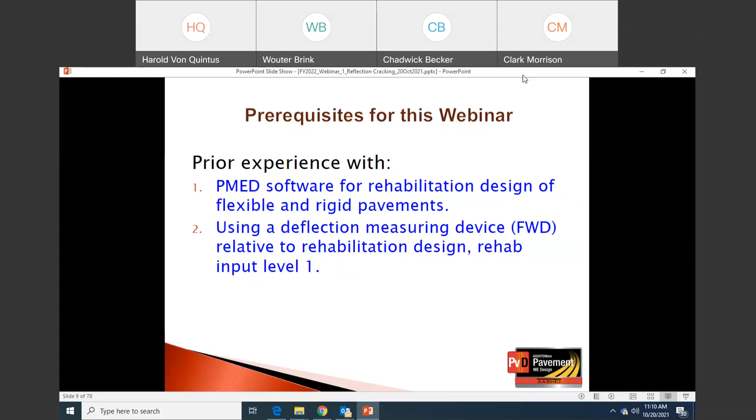Our learning outcomes, there are 4 of them today. The first is to describe the fracture mechanics based model included in the Pavement ME software for predicting reflection cracking in asphalt overlays, of both flexible and rigid pavements. Our second outcome is defining the importance of the load transfer efficiency for cracks in existing pavements and its impact on the prediction of reflection cracks.

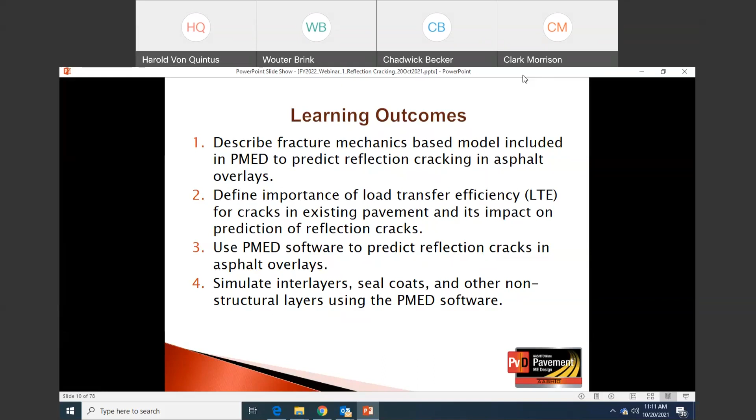Our third learning outcome is using the Pavement ME software for predicting reflection cracks in asphalt overlays. And the final outcome, tied to the third, is simulating different reflection cracking mitigation strategies like interlayers, seal coats, and other non-structural layers in accordance with the Pavement ME software itself.

So with that, this is the outline of the webinar for today. There are really 6 items. 1 through 4 will be a summary, and then topic 5 will be where we spend about half the time on simulation of the mitigation layers for reflection cracking. Then we will have a summary, closing comments, and a question and answer session at the end, like we typically do for each of the webinars.

So we'll start with the history. Very briefly, in version 2.1 and earlier versions, the prediction of reflection cracks was simply based on a pure empirical regression equation, and that regression equation was only applicable to load-related or fatigue cracks.

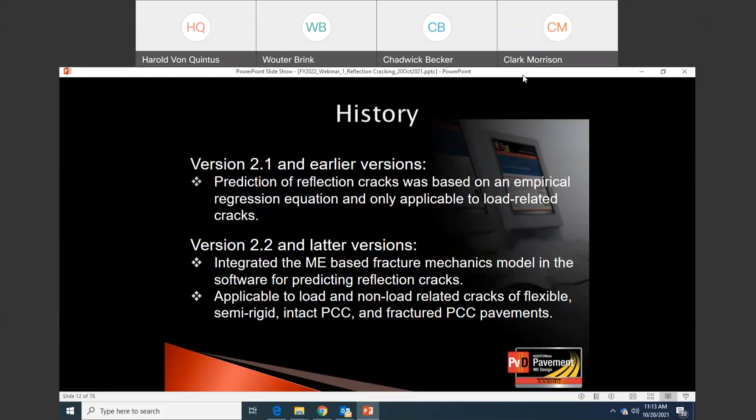The reflection cracking fracture mechanics model was integrated in version 2.2 and is applicable to both load, fatigue, and non-load related cracks, transverse cracks of both flexible, semi-rigid, intact concrete slabs, and fractured concrete slabs and/or pavements.

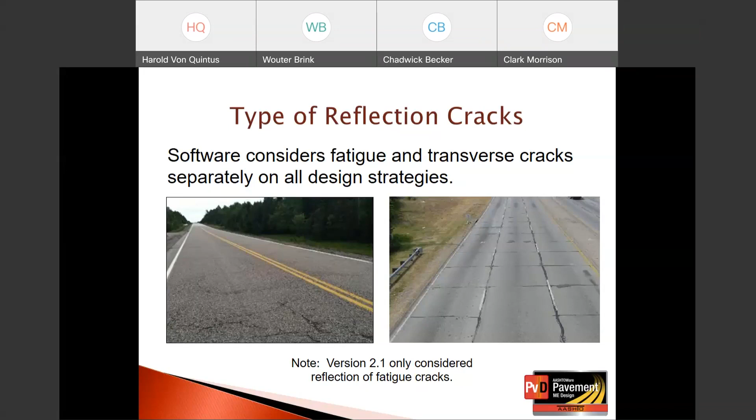That sounds good. So the types of reflection cracks for all types of pavements and rehabilitation design: the Pavement ME software does consider fatigue and transverse cracks separately for all design strategies. As noted previously, version 2.1 was only applicable to reflective fatigue cracks, and the fracture mechanics based version added the non-load thermal or transverse reflection cracks.

As a reminder, the reflection cracking transfer function and models were integrated in Pavement ME from the product of NCHRP 1-41. Dr. Robert Lytton was the principal investigator and guided all of the work in developing this fracture mechanics based reflection cracking procedure. All of the updates on reflection cracking are included in the 3rd edition of the MEPDG Manual of Practice itself.

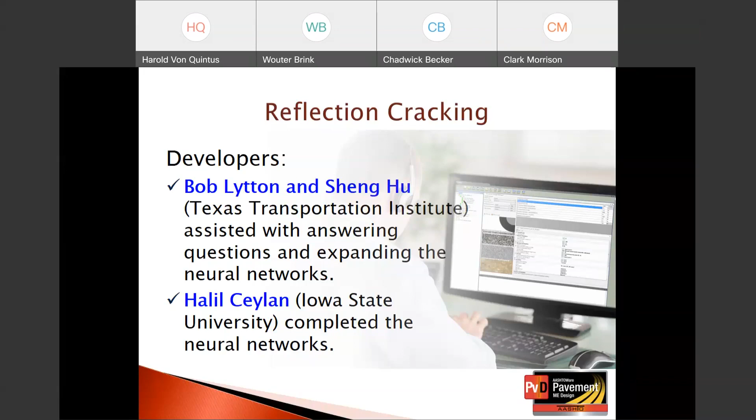In addition to Dr. Lytton, who with the Texas Transportation Institute was involved in the original NCHRP project and also assisted with answering questions and expanding on the neural networks for the reflection cracking models integrated in Pavement ME, Halil Ceylan with Iowa State University completed all of the neural nets, the original ones and the expanded neural nets, included in the Pavement ME software in 2015, version 2.2, as well as later versions.

So now moving on, we want to go through the mechanism and the designs. There are basically 3 types of mechanisms included. The first and more important is the differential vertical deflections across joints and cracks in asphalt and rigid pavements. These are traffic induced and basically shear related, the cracks initiate and propagate in shear itself.

The second mechanism is thermal expansion and contraction of the joints and cracks in the asphalt and/or rigid pavements. That is thermal induced, and the crack initiates in tension but propagates in tension and shear over time. The third mechanism is bending related, where we get higher deflections in the overlay directly above the cracks in the existing pavement. This is traffic induced, and the crack initiates in tension or flexural, then propagates in tension and shear itself.

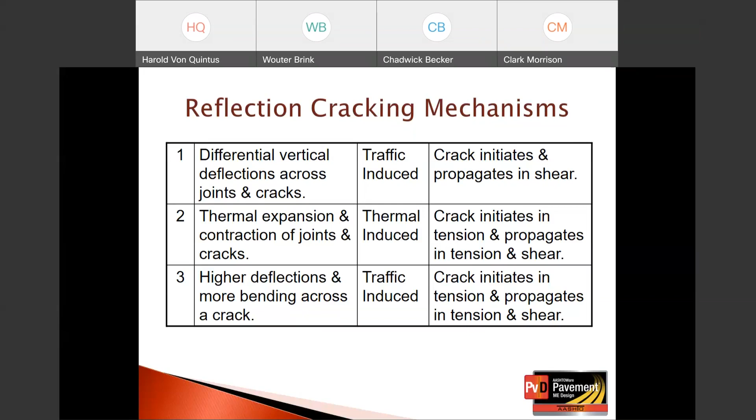Those 3 mechanisms are schematically illustrated in this slide. The 3 we'll refer to are shear, thermal, and bending. When a wheel load goes across the location of a crack in the existing concrete or asphalt layer, there are differential deflections as the load crosses the crack. Those are related to shear in the asphalt overlay.

There's also bending as the load goes across the crack in the existing pavement, where we have increased tensile strains at the bottom of the asphalt overlay. And then the thermal mechanism, which is simply the horizontal movement of the concrete base and/or asphalt layer that causes tensile strains above the crack in the concrete and/or asphalt base in the asphalt overlay itself.

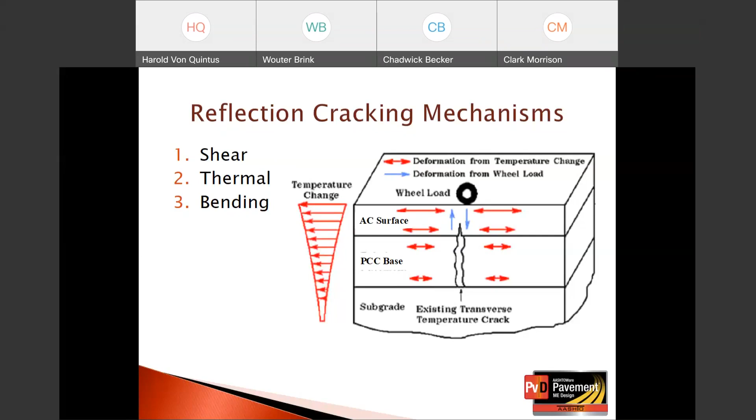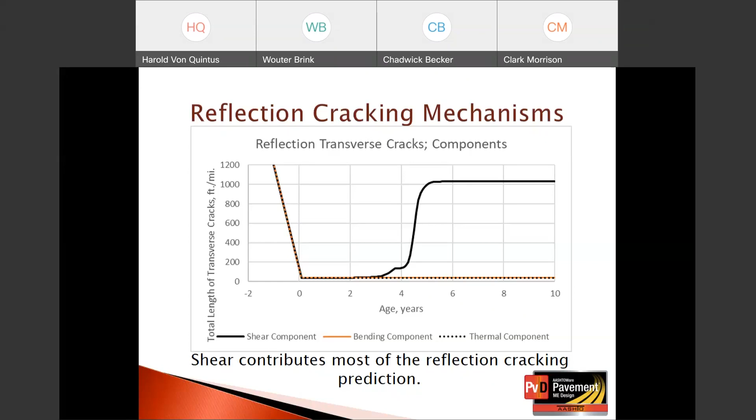The bending in the solid orange and the thermal component in the dashed black lines are minor compared to the contribution of shear as related to reflective transverse cracks. And that's true for most of the situations or the designs, the rehabilitation designs using the Pavement ME software. Now, the different rehabilitation types that can be performed and that are applicable to reflection cracking are listed on this slide.

There are semi-rigid pavements where there's asphalt layers over a cementitious or cement stabilized layer, and reflection cracking does apply, for a new semi-rigid pavement. We have asphalt overlays, flexible pavements, asphalt overlays of semi-rigid, asphalt overlays of intact jointed plain concrete, asphalt overlays of fractured jointed plain concrete pavements, and asphalt overlays of CRCP. All of these reflection cracking scenarios would be applicable to all of these different rehabilitation strategies.

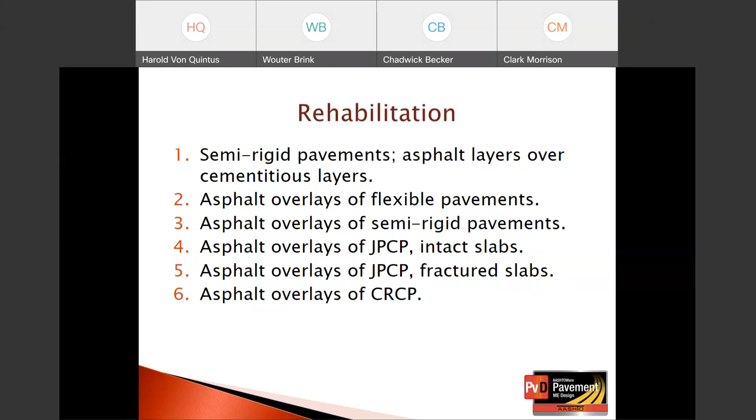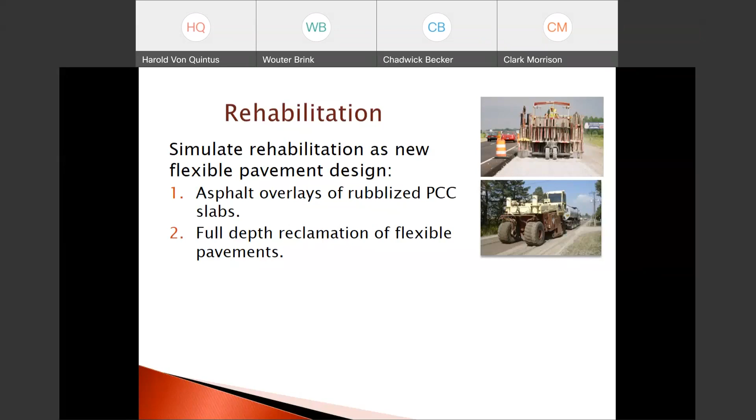ME does have strategies related to rehabilitation, but are considered or assumed to be new flexible pavement designs relative to the MEPDG manual of practice. These two are asphalt overlays over a rubblized PCC slab and full depth reclamation of flexible pavements. Since these two strategies are simulated as new flexible pavement designs, reflection cracks and reflection cracking prediction is basically a non-issue.

The other flexible pavement rehabilitation techniques that do have application for reflection cracking, and that we will cover today, are hot in place recycling and cold in place recycling. Obviously, if the cold in place recycling is consuming the entire asphalt layer that is being recycled in place, then that would be simulated also as a new flexible pavement design. If all or the majority of the existing asphalt layer is mixed in place or recycled in place, then that would be considered a new flexible pavement design, and reflection cracking would not be applicable.

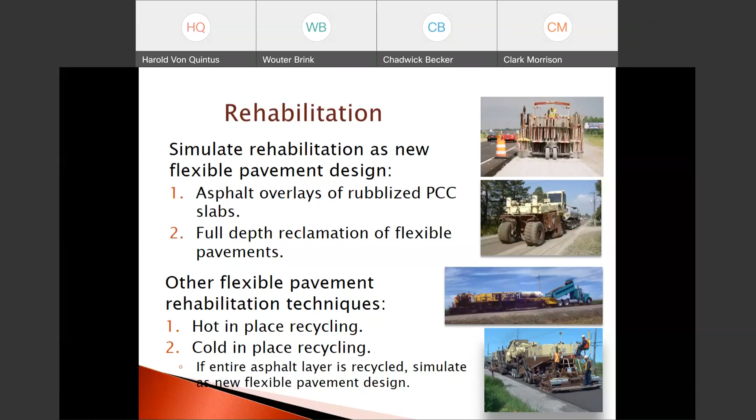The different design strategies that are included in Pavement ME are listed in this slide. The first is simple asphalt overlays on an existing pavement surface. The surface is asphalt that can be milled or not milled. We can also have a simple asphalt overlay over a jointed plain concrete intact, and/or an asphalt overlay over a CRCP. We can also have asphalt overlay design with chip seals or seal coats, as shown in the drop-down box from Pavement ME on the right.

The third we can do is an asphalt overlay with an interlayer. And then two others that are not shown but can be simulated using Pavement ME, which we will cover, are asphalt overlays with a SAMI, a stress or strain absorbing membrane interlayer, and an asphalt overlay with a crack relief layer. We'll cover each of these conditions today in the webinar.

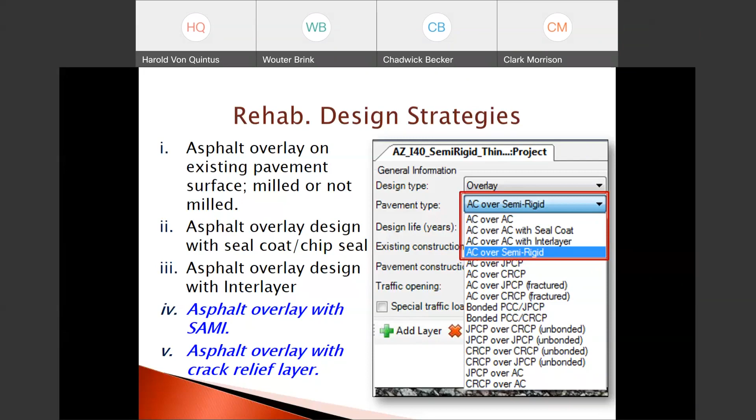So now we want to move to basically the inputs. What are some of the inputs for the different design strategies? I'm going to go through these as you would see them when using Pavement ME. The first are the threshold values, and I just want to make a few statements about the threshold values, specifically related to reflection cracking, as shown at the bottom of this slide in blue: AC total fatigue cracking, bottom up and reflective, and AC total transverse cracking, thermal and reflective cracking in feet per mile.

Some agencies use a different threshold value between total fatigue cracking and reflective, as opposed to new bottom-up fatigue cracking, as shown on the third or fourth line down at 15%. It's generally recommended that the same threshold value be used for new AC bottom-up fatigue cracking and AC total fatigue cracking, that would include new bottom-up cracks in the overlay and reflective fatigue cracks from the existing asphalt pavement itself. Those should have, or it's generally suggested, that the threshold values be the same.

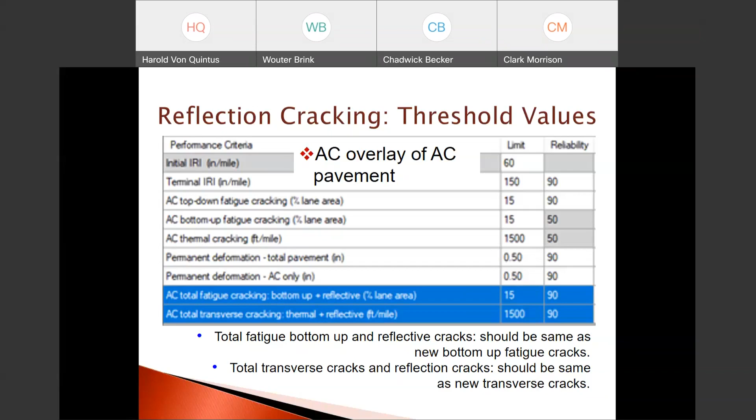For the semi-rigid pavements and/or overlays of semi-rigid pavement, this shows the threshold values. A little different here, where the total fatigue bottom up and reflective cracks should be the same as new fatigue bottom up cracks, should be either equal to or greater. Well, it should be the same for new bottom up fatigue cracks. The chemically stabilized layer, shown by the orange box, where the cement treated base fatigue threshold value is typically equal to or can be greater than the total bottom up fatigue cracking in the asphalt overlay. The transverse cracking would also be the same as new transverse cracks as shown on this slide.

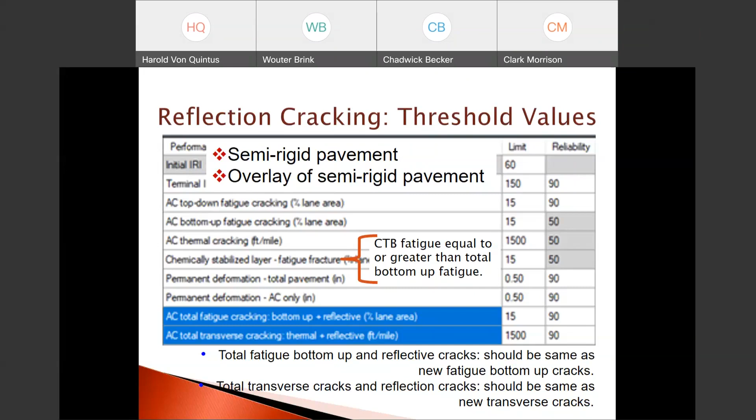In this condition, if we had 15% AC total fatigue cracking, shown in blue as a threshold value, then we could set the chemically stabilized layer to be about 20%, but that's up to the designer and or the agency for providing a suggested threshold value for the chemically stabilized layer relative to AC total fatigue cracking.

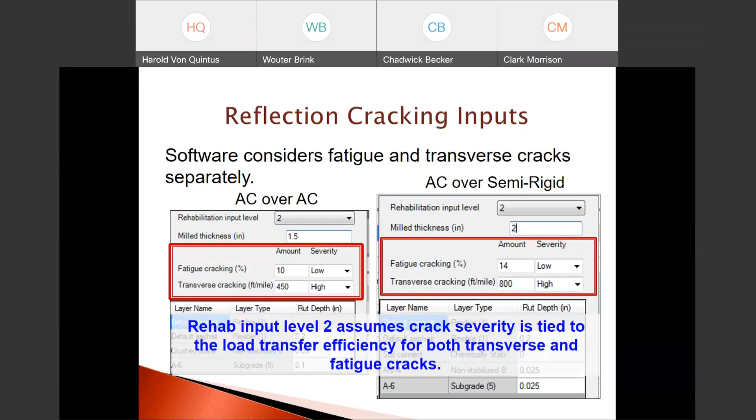The reason the severity level is entered is rehab input level 2 assumes that the crack severity is tied to the load transfer efficiency of both transverse and fatigue cracks. In other words, we wouldn't have any FWD deflection data to measure the load transfer efficiency. So in this case, the crack severity in terms of the pavement ME global values are tied directly to crack severity.

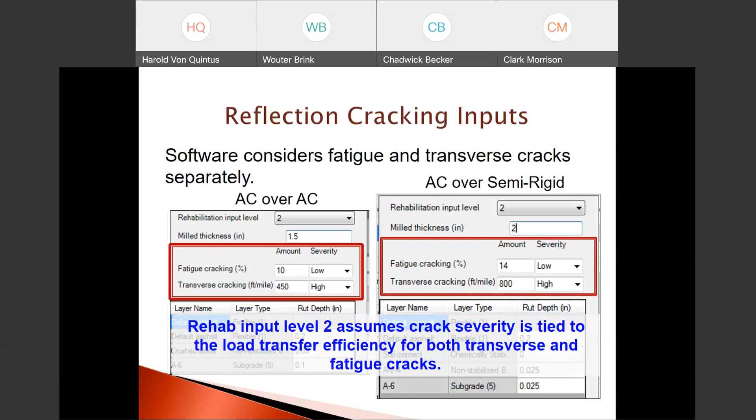This next shows semi-rigid, where we have an asphalt layer over a CTB or cementitious stabilized base layer. Our three inputs for semi-rigid pavements, shown in the red box from the pavement ME drop-down screen, are the crack spacing, the transverse crack spacing, or the shrinkage crack spacing of the base layer, the CTB, which in this example is 25 feet.

The load transfer efficiency of the transverse shrinkage cracks, shown in this example, is 50%. Then also there's the load transfer efficiency of the fatigue cracks that develop in the CTB or chemically stabilized base from a load standpoint over time, also shown here as 50%. The 50% for transverse and 50% for fatigue are the global default values.

As I said previously, the load transfer efficiency of the chemically stabilized base can be measured with the FWD. The load transfer efficiency of the fatigue cracks, since they occur later, is typically considered or included as a calibration parameter.

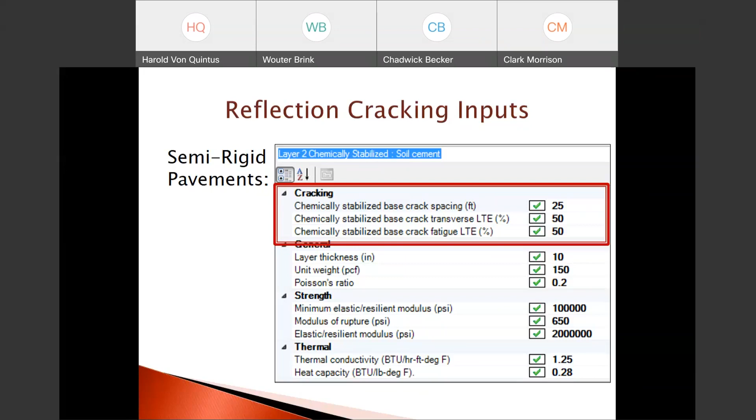This next is the inputs or threshold values for AC overlay of an intact PCC. It's basically similar to semi-rigid. The important point here is that, as shown in blue in the drop-down screen, AC total transverse cracking, thermal and reflective, should basically be the same as AC thermal cracking new, shown in the row above in this drop-down screen. Those should be similar. The threshold for the JPCP transverse cracking would also apply, shown as 20% in this screenshot.

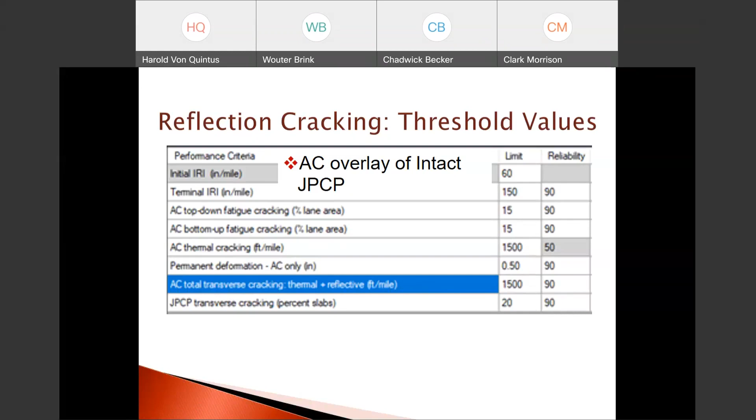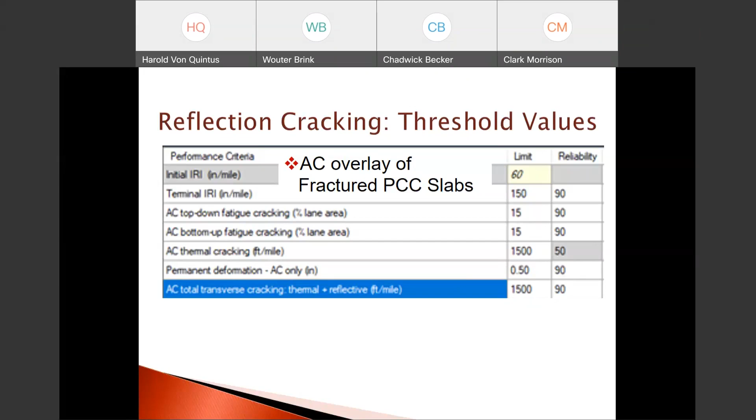This next is AC overlay of fractured Portland cement concrete slabs. Our value here, shown in blue, is AC total transverse cracking, which is thermal plus reflective. It is suggested to be the same as AC thermal cracking new, shown in one of the above rows in this slide. Basically, they should be the same, or it's generally suggested that the threshold values be the same.

The next is the inputs for AC over fractured jointed plain concrete pavement. There are basically two for characterizing that PCC fractured slab: the crack spacing, which is normally 3 feet as the default, though that value can vary from about 2 to 5, and the load transfer efficiency of those fractures itself, shown in the screen as 50%, which is the global default value.

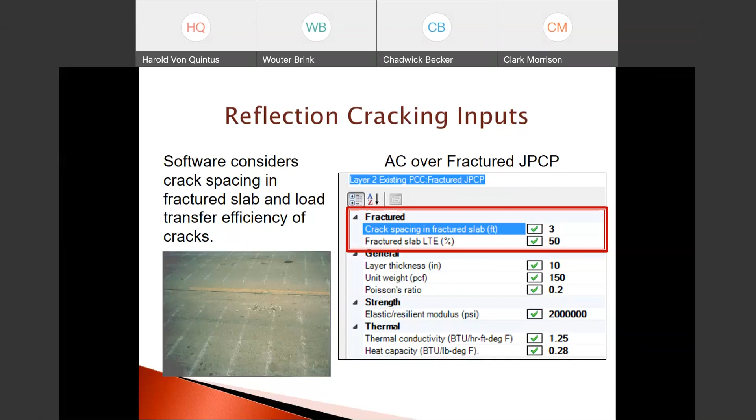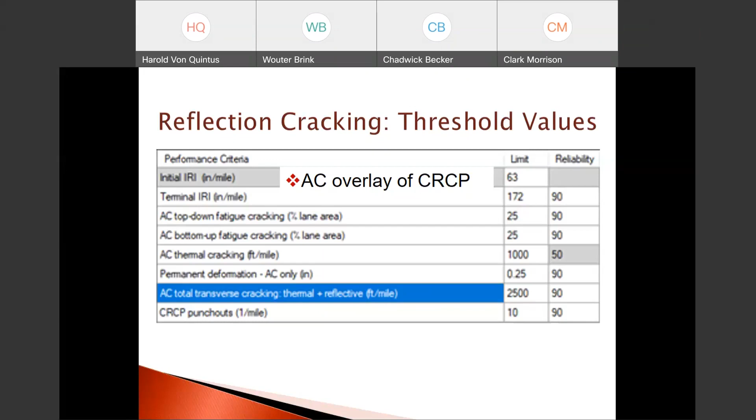Next is the AC overlay of the CRCP pavement. Again, it's recommended that the AC shown in blue, AC total transverse cracking, thermal and reflective, should be the same as AC thermal cracking shown in the above line item. It's not shown to be the same here - that just forgot to change it. Generally they should be the same threshold values. And then also the CRCP punch out shown in the lower row of the drop-down screen.

Now, moving on from the inputs, we want to briefly note the calibration coefficients and provide a couple of comments about the calibration coefficients themselves.

The calibration coefficients were derived using the LTPP sites and a few other non-LTPP sites where data existed, and it was recommended for use within the NCHRP study 1-41, but the majority came from LTPP. The majority of those sites were basically overlays with and without milling. A large majority of the LTPP sites for the rehabilitation calibration of reflection cracking came from LTPP SPS 5 and SPS 6, having to do with asphalt overlays of flexible pavements (SPS 5), and asphalt overlays of concrete pavements, both intact and fractured slabs, as part of the SPS 6 LTPP program.

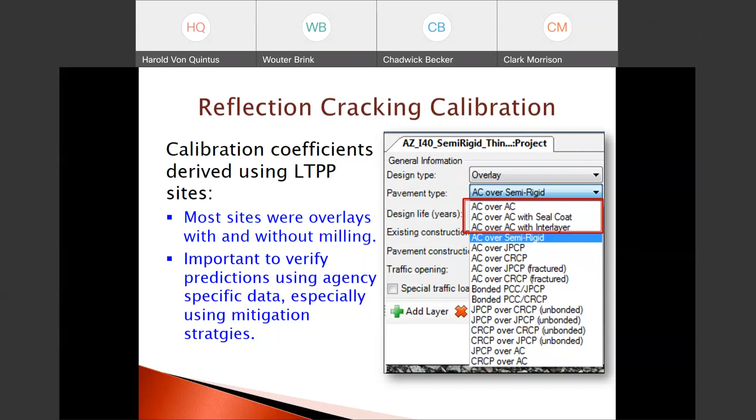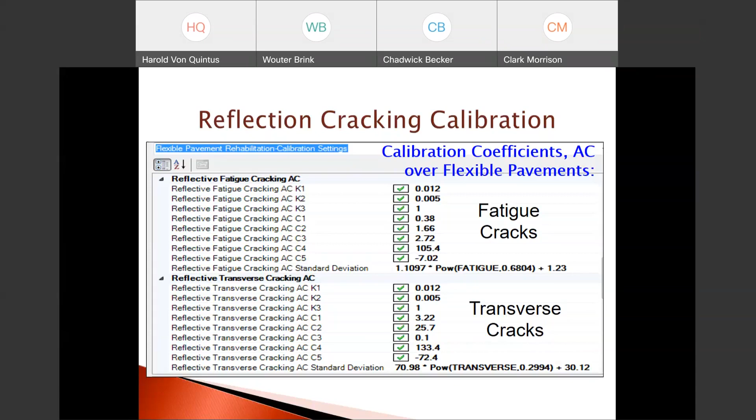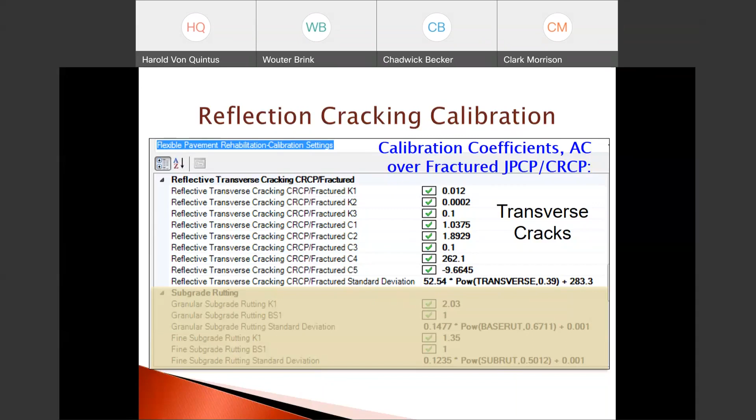Given that, I have one observation we wanted to make, because a lot of these calibration sites were from the long-term pavement performance program: in terms of the seal coats, and to some degree the interlayers, they do not result in a significant difference in predicting reflection cracking for asphalt overlays over flexible pavements.

The reason for that we'll get into a little later, but for the majority of the sites, on average, the seal coats and the interlayers made little impact on the predicted fatigue as well as transverse cracks on these sections that were used for calibration.

Thus, it is important to verify this, because that is not the case with some agencies, where they have found and verified that there is a contribution, especially for interlayers, as well as seal coats, in delaying, not preventing, but delaying reflection cracks. It's important to verify the predictions using agency-specific data.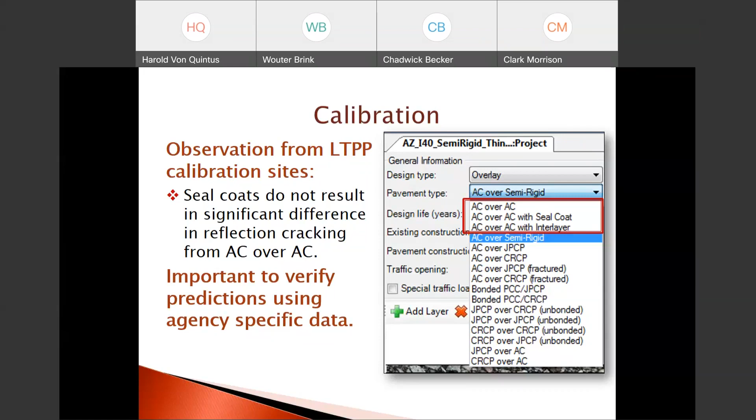So now let's move to the simulation of reflection cracking mitigation strategies. This is where we'll spend probably most of our time, an additional 30 minutes or so. We want to go over the simulation of the reflection cracking mitigation strategies, and also look at some of the high impact input variables.

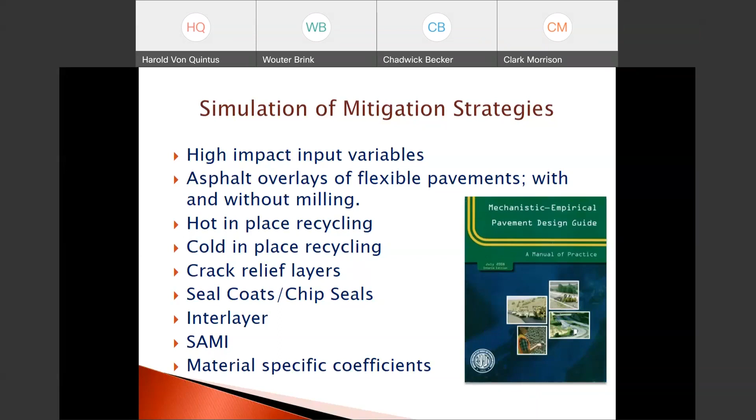This is for whether we have an asphalt overlay of a flexible or rigid pavement. We want to go over how we simulate not only the strategies directly included in the Pavement ME software, but others that can be simulated, like hot in place recycling, cold in place recycling, thicker crack relief layers, chip seals, seal coats, non-structural interlayers, stress absorbing membranes. Then we want to spend a little time on material specific coefficients.

So first, what are some of the high impact factors that have a large impact on the prediction of reflection cracking through the Pavement ME software? Obviously, one of the very important factors is the asphalt overlay thickness. It has a huge impact.

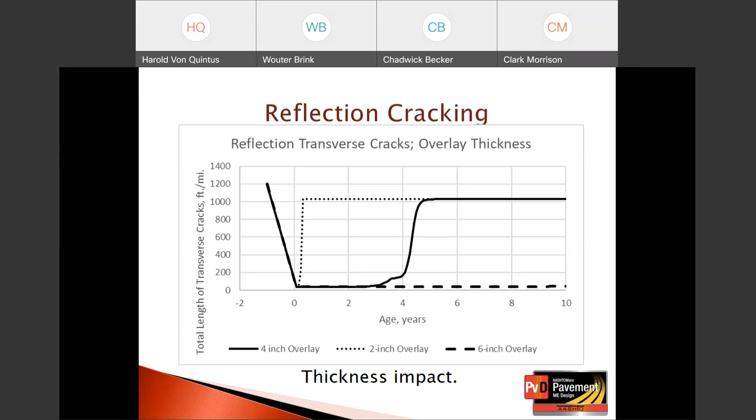They don't start to occur, or we don't start to see them at the surface, until a longer period of time. The 6-inch asphalt overlay, the longer dashed line, shows that it basically prevents, within a period of 10 years, any significant reflection of the existing transverse cracks from the existing flexible pavement through a 6-inch asphalt overlay. Overlay thickness is very important for fatigue and transverse reflective cracks.

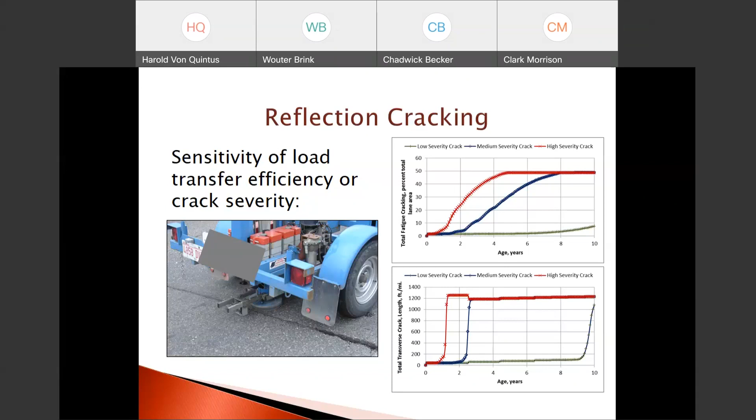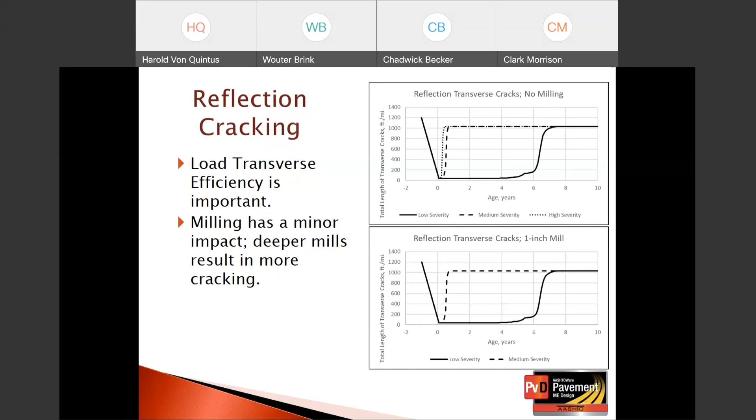Okay, this now shows the reflection cracking for transverse cracking. Again, load transfer efficiency is important. The solid black line on top is for low crack severity transverse. The longer dashed line is for medium severity crack transverse. The short dashed line is for high severity. The graph on the bottom is the same thing, but for only low and medium crack severity with a 1-inch mill. The milling depth basically has a minor impact on the predicted transverse cracks.

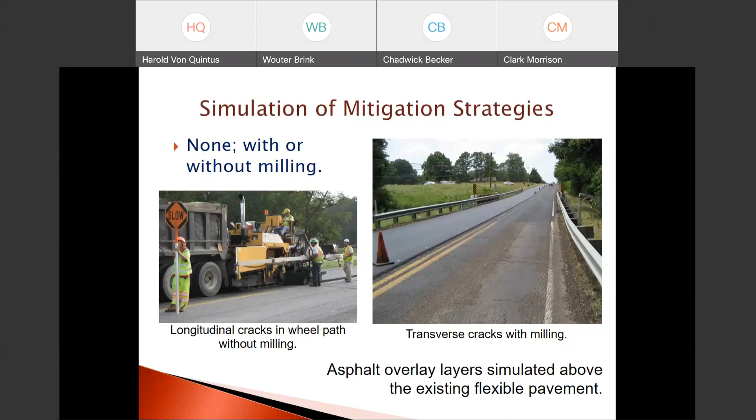Now, moving into the simulation of different mitigation strategies, we'll first do some examples on no milling versus with milling. Without milling, we can have longitudinal cracks in the wheel path. The photo on the right shows an existing flexible pavement with transverse cracks, with milling and then an overlay. Asphalt overlay layers for both existing pavements that are not milled versus those where milling is included are basically the same as for a new asphalt layer. The only difference is simulating or characterizing the existing pavement.

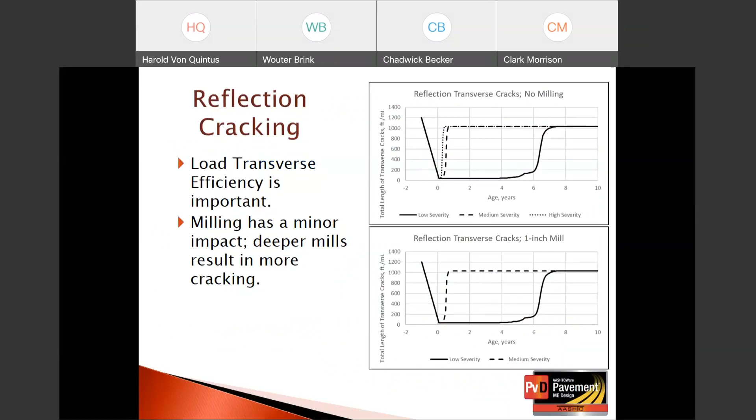So this now shows the milling depth simulation. And we want to make this statement again, we've noted it in memos, it's noted in the MEPDG Manual of Practice, but we want to make sure there's a clear understanding of what thicknesses are entered in the Pavement ME software for a rehabilitation overlay design strategy of an existing flexible pavement. So we have an average thickness of cores of 5.5 inches for a design segment.

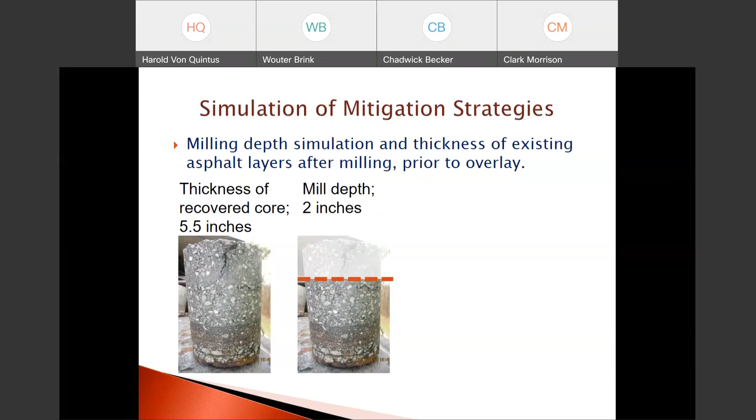We're then going to decide to mill the upper 2 inches, so we're removing the top 2 inches due to milling. So what gets entered into Pavement ME for rehabilitation level 1 or 2: as shown in the middle box, we have a mill thickness of 2 inches, and shown in the bottom box, we have the thickness of the existing layer of 3.5 inches. So the thickness of the existing asphalt layers is the average thickness recovered from cores minus the mill depth: 5.5 minus 2 equals 3.5 inches, and that's what gets entered into Pavement ME for the existing asphalt layers.

Focusing on the middle block, you can see we have our fatigue cracking of low severity, but the amount of cracking is not entered because this is rehabilitation input level 1, and we're having the program estimate the amount of fatigue cracking. Transverse cracking is from the distress surveys, 400 feet per mile, rated as low severity, and both of those get entered into Pavement ME.

Okay, so let me go back. If we're doing a mill and overlay, how do we determine, for rehab input level 2, the amount of fatigue cracks remaining in the existing pavement? Damage is typically defined by the amount of cracking on the surface, or back-calculated using elastic layer theory for rehab input level 1. Those cracks are assumed to be at the surface, or bottom-up fatigue cracks, if we do not have cores or FWD testing. Since they're assumed to be bottom-up cracks, any cracks we see at the surface, even though we're milling 1, 2, or 3 inches, that same amount of cracks will exist regardless of the milling depth for a specific design strategy.

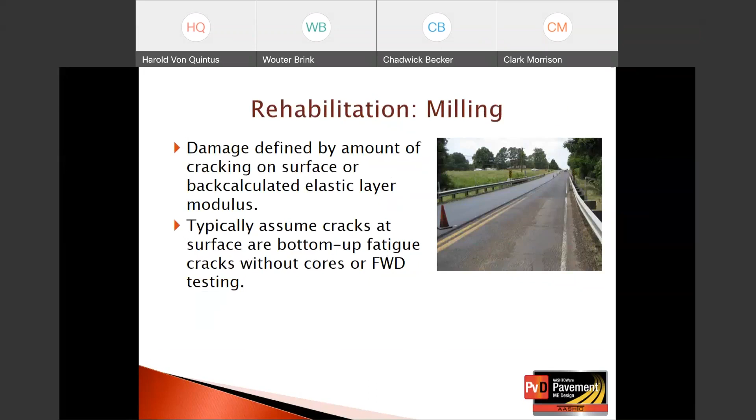If we don't have cores or FWD testing to evaluate crack depth or look at cracking at the surface with different potential mill depths, one suggestion is that if we're doing rehab input level 2, the cracks at the surface, if we're doing milling, those would also be entered for the amount of fatigue cracking for rehab input level 2.

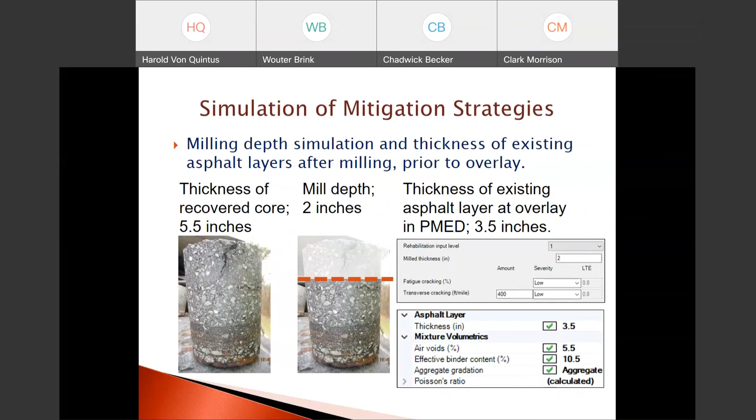So now, milling and no milling. We have 2 examples that I've shown here from an example. We have a mill depth of 0 and then a mill depth of 2.5 inches.

We have an existing pavement layer from cores, the first one would be 7.5 inches. That's a mill depth of 0. We're going to mill 0, and then we're going to simply place an overlay of 2 inches.

The second example, we're going to mill 2.5 inches. So our existing asphalt pavement is 7.5 minus 2.5, that's 5. Our replaced milled layer is 2.5 inches, and then above that we're going to put a 1.5 inch overlay, dense graded overlay.

The graphs at the surface show the predicted reflection cracks on the left for fatigue cracking and the prediction of transverse reflection cracks on the right. If you're looking at the graph on the left, we have no mill and a 2 inch overlay on the black solid line, where those cracks are going to propagate fairly rapidly.

And then by milling, remove and replace, that's the dashed line where we're putting on only 1.5 inches more asphalt, but the total new asphalt is basically 4 inches. That's the replaced mill depth plus the overlay thickness above the mill material that is replaced. So the dashed black line shows the predicted fatigue cracks measured over 20 years. The graph on the right shows the same thing, but for transverse reflection cracks.

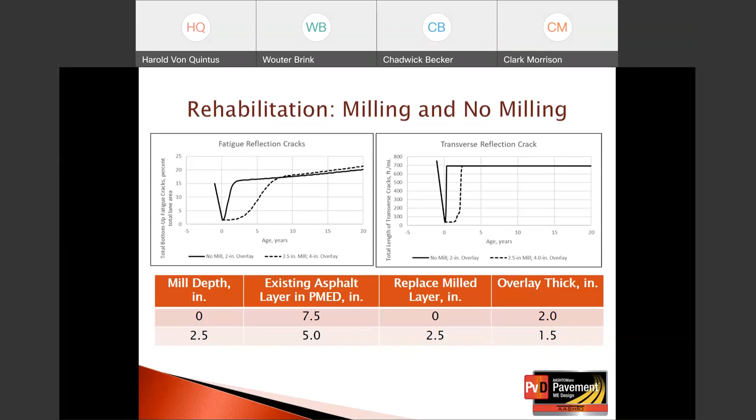Okay, now let's move to hot in place recycling. This is an option that's used, and the question is, will the hot in place recycling remove all surface cracks, but what about the existing damage?

Rehab level 1 is preferred or suggested, as noted previously, because we'll use back calculated elastic modulus to determine the amount of damage in the existing asphalt that remains, and our assumption that the cracking we see at the surface, if we do not have cores, then we assume all of those cracks have propagated from the bottom to the surface.

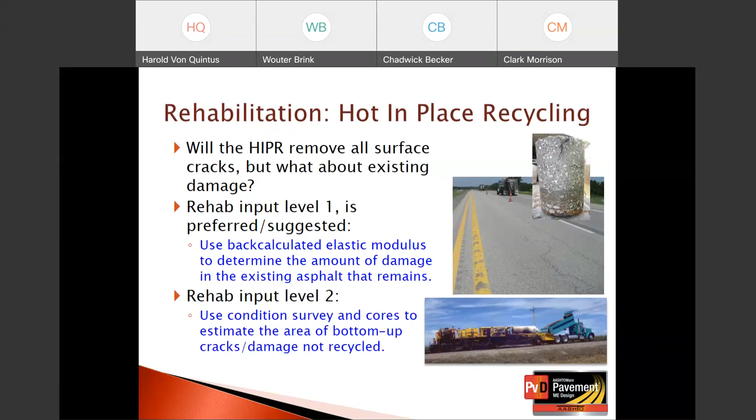So what we see on the surface would be entered for rehab 2, even for a hot in place recycling, the amount of bottom up cracking prior to overlay, after the hot in place recycled material is completed. Rehab level 2 uses the condition survey and cores to estimate area of bottom up cracks and damage that's not recycled. Kind of just what I previously said.

Okay, so this is our simulation. Rehab input level 1. This is we're milling 1.5 inches, as shown in the middle box for rehab level 1 as suggested.

So the fatigue cracking amount is blank, because that's being determined by the program from the back calculated elastic layer moduli to define damage. The cracking is believed to be low severity from the surface observations.

Transverse cracking, we have 400 feet per mile that we see at the surface prior to the hot in place recycling, and those are of low severity.

For rehab input level 1, I'll come back to this. As shown in the drop-down box on the right in blue, the back calculated average elastic layer moduli for the existing asphalt layer is 620,000 PSI at a frequency of 30 Hertz and at an average mid-depth temperature of 85 degrees Fahrenheit. A rehab input level 2 can be an option.

If there's minimal cracking at the surface and we do not have FWD testing available, we have to decide what amount we're going to enter. So for rehab level 2, I entered 1%, and I did that for a specific reason that I'll show in just a minute, low severity.

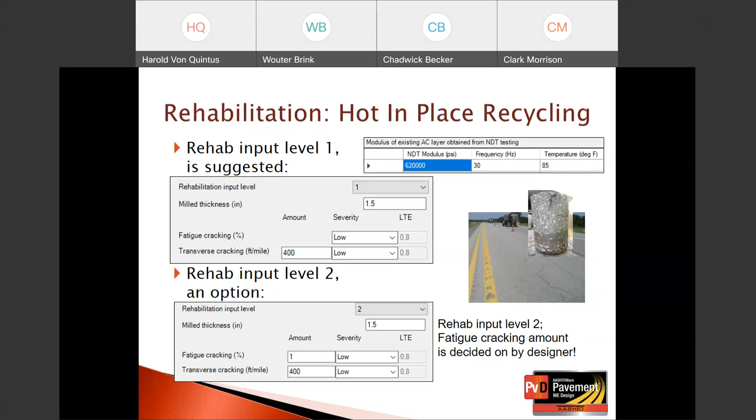As noted previously, it would be a suggested value that whatever fatigue, bottom fatigue cracking, wheel path cracking we see at the surface, if we do not have cores to confirm that's top down and or bottom up, and we don't have deflection testing, then we would enter the amount of fatigue cracking based on the amount of cracking observed at the surface of the pavement prior to the hot in place recycling strategy. So this now shows the difference.

For rehab input level 1 in our example, I show a black line, and that's for rehab input level 2, for total bottom-up fatigue cracking in the top graph. The dashed line is for rehab input level 1.

The bottom graph is for the total length of transverse cracking. The assumption for transverse cracking is that it extends through the entire asphalt layer. Originally, as shown for rehab input level 2, the lower box, we assumed only 1% fatigue cracking, meaning there would be no fatigue cracks on the surface.

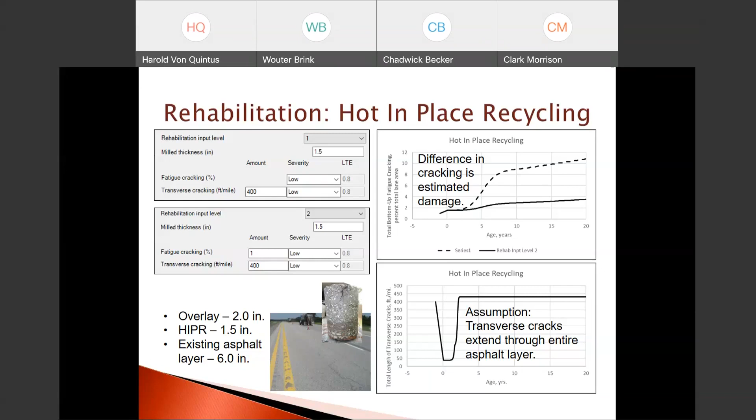In this example, I should have mentioned our hot in place recycling was 1.5 inches, then we had an overlay of 2 inches, and our existing asphalt layer below the HIPR, hot in place recycled layer, was 6 inches.

Now let's move on to a cold in place recycling example. This is similar to hot in place recycling. We need to estimate cracks and damage remaining below our cold in place recycling layer, assuming we're not recycling the entire asphalt layer, only a portion of the asphalt layer that exists.

We have rehab input level 1, which is preferred or suggested, and rehab input level 2. Rehab input level 1, just like our previous example, is going to use back calculated elastic moduli to determine the amount of damage in the existing asphalt layer that remains.

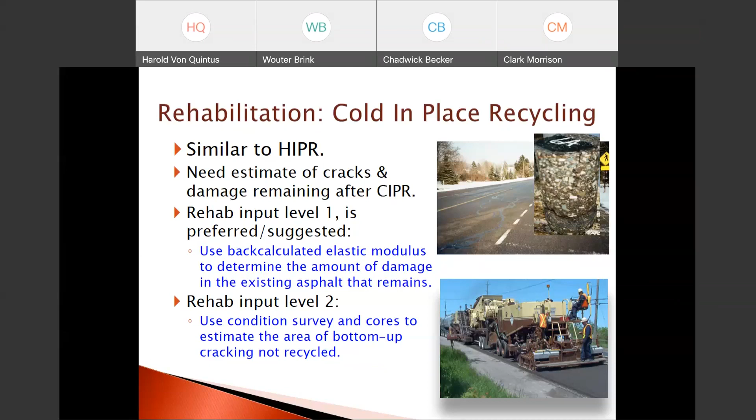Rehab input level 2 uses a condition survey and cores to estimate the area of bottom-up cracking that's not recycled. Again, the same thing would be suggested: if we're just doing rehab input level 2, any cracking seen on the surface in the wheel path, we assume is bottom-up cracking going through the entire asphalt layer. That's the amount of fatigue cracking in the existing surface we would include in Pavement ME. If we have cores and know most of the cracking is top-down cracking at the surface, then that would not be the case.

This now shows rehab input level 1. We have an overlay of 2 inches, we're doing cold in place recycling of 4 inches, and so our existing asphalt layer that remains is going to be 5 inches.

For rehab input level 2, the fatigue cracking amount is decided again by the designer. The designer makes that decision.

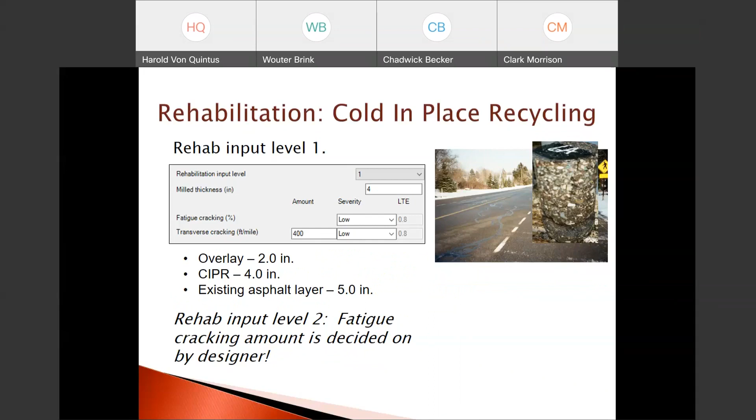This now shows the importance of the condition of the existing layers. We included these to show, if we have a good intact asphalt layer versus a relatively poor condition asphalt layer, what impact that makes on reflection cracks. Here we've shown an elastic average back calculated layer modulus of 580,000 PSI for total bottom up fatigue cracking, and you can see we have about 20% cracks, bottom up cracks, that are going to reflect through over a 20-year design.

Here we have what would be considered a very good existing asphalt material, with little damage in the existing layer. Our back calculated layer modulus is 750,000 PSI, and you can see that no total bottom up fatigue cracks are going to propagate to the surface in that 2-inch overlay with the cold in place recycled layer of 4 inches.

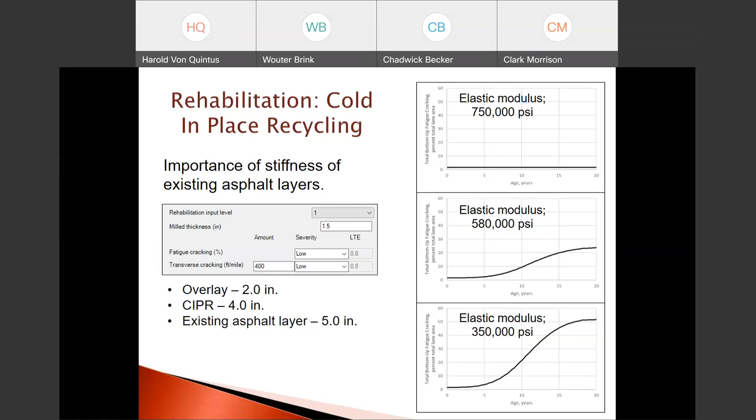Okay, so now let's look at a crack relief layer. We're going to simulate a crack relief layer. This is an overlay of 2 inches, a crack relief layer of 4 inches, and our existing asphalt layer of 5 inches. So we have an existing layer where, let's say, we have 8 to 9 inches of existing layer, and we're going to remove material to keep the final grade similar. We're going to remove the upper 4 inches, replace it with a crack relief layer, and then put a 2-inch overlay on it.

What I've shown here is the total bottom-up fatigue cracks predicted in the asphalt 2-inch overlay over 20 years. You can see almost none of the cracks, or less than 4%, are going to reflect. The solid black line is for the existing back-calculated modulus of 580,000 PSI, and the short dashed line is for 350,000 PSI back-calculated elastic layer moduli for the existing asphalt layer. So the solid black line is a reasonable condition with some damage, while the short dashed line would have a lot of damage in that existing layer. But this crack relief layer, under this condition, basically delayed those cracks from reflecting through the surface for both conditions over 20 years.

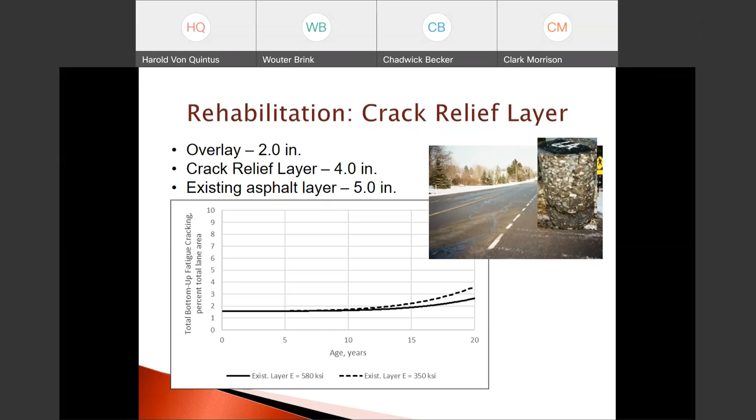This is another example comparing the crack relief layer strategy to the cold-in-place recycling strategy. The short dashed line is the 350,000 PSI existing asphalt layer, and the solid line in both graphs is the 580,000 PSI. So the condition of the existing pavement can make a big difference. The type of rehabilitation or reflection cracking mitigation strategy can also have a big impact, as shown in these two graphs. The overlay design strategies: the upper one uses a crack relief layer of 4 inches and an overlay of 2, and the lower uses cold-in-place recycling of 4 inches. In this case, we only have 5 inches remaining of the existing pavement layer and a 2-inch overlay. So the condition of the existing pavement, as well as the reflection cracking mitigation strategy, can make a big difference in our rehabilitation design.

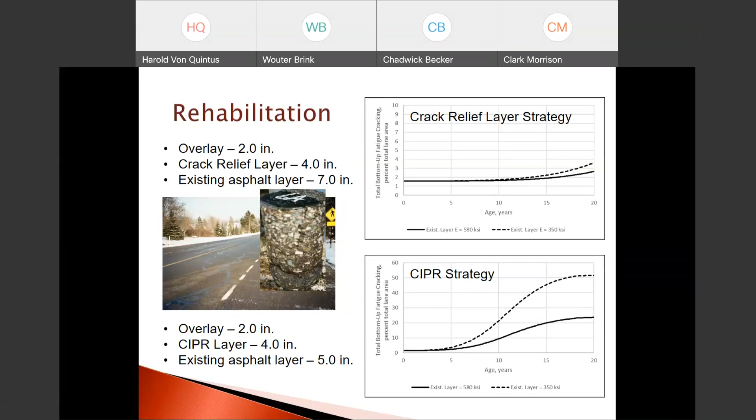They're both important. Again, looking at a crack relief layer above a fractured Portland cement concrete. We're using the same reflective crack mitigation strategy, but this is for crack-and-seat or fractured PCC slabs, as opposed to using a leveling course and dense graded overlay. So I've shown the inputs here: we have a crack spacing, fractured, of 3 feet—that's the crack spacing in the PCC for the fractured slabs. We have a low load transfer efficiency, in this case, of 65%, and an elastic modulus of the PCC above the cracks of basically 2 million PSI. The table at the bottom shows we have a slab thickness of 10 inches.

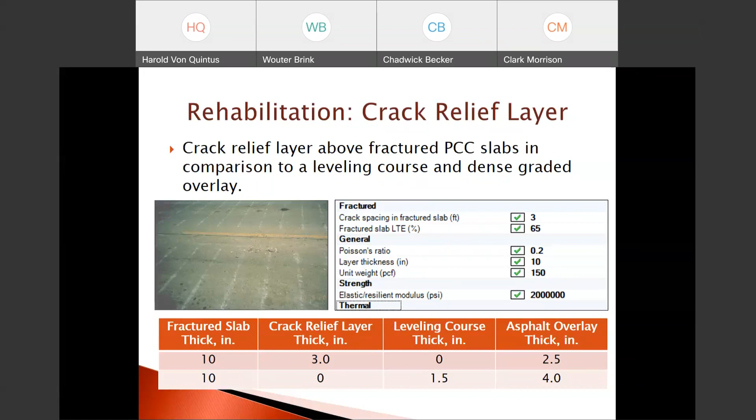In one case, we're going to put in a 3-inch crack relief layer of asphalt, with no leveling course, and a 2.5-inch overlay. The comparison is not using a crack relief layer: a 1.5-inch leveling course and then a 4-inch asphalt overlay. So basically 5.5 inches of new asphalt mix for both cases: the 3-inch crack relief layer plus the 2.5 overlay equals 5.5, and the leveling course of 1.5 plus an asphalt overlay of 4 also equals 5.5.

So now this shows the comparison of these two strategies. The graph on the left is bottom-up fatigue cracks. The dashed line is the crack relief layer, and the solid line is the leveling course using dense graded materials with no crack relief layer. The graph on the right shows the predicted transverse reflection cracking. The solid line is the dense graded material, and the dashed line is the strategy using a crack relief layer.

So the question becomes, what happened in the graph on the left, bottom-up fatigue cracks, where we show a lot more bottom-up fatigue cracks when using the crack relief layer? The reason is the crack relief layer has high air voids and low asphalt content. In this example, I think it was about 20% air voids and only about 5% effective asphalt by volume. So fatigue plays a significant role because those typical layers have very low fatigue strength resistance, or they're susceptible to fatigue cracking.

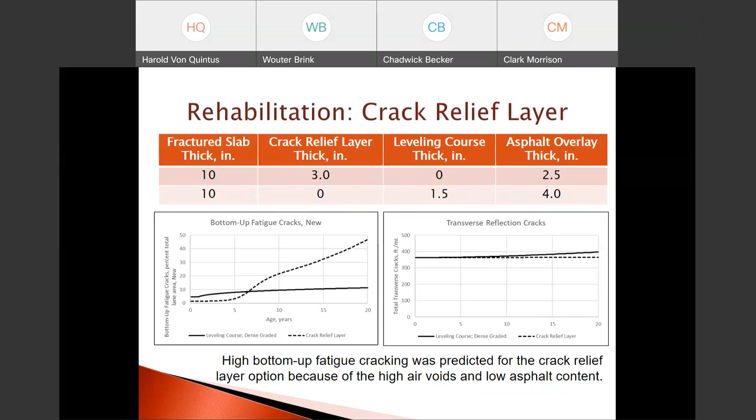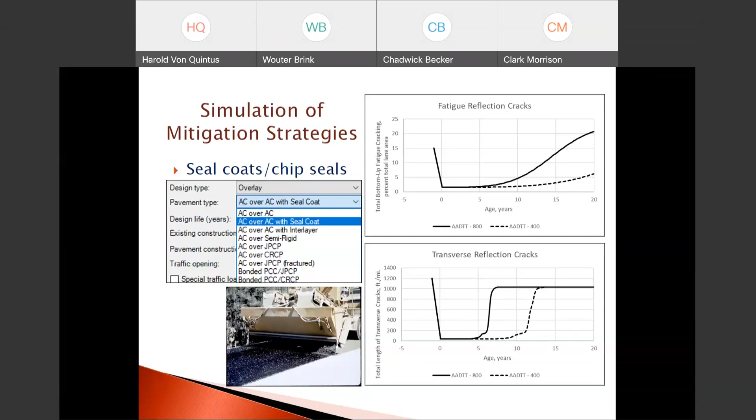The same is true for interlayers, for the reasons I gave near the beginning of the webinar. The top graph shows the same thing for bottom-up fatigue reflective cracks, and the graph on the bottom shows transverse reflection cracks.

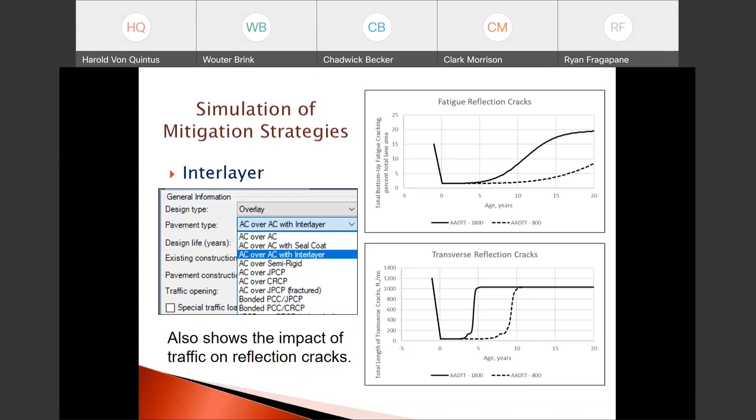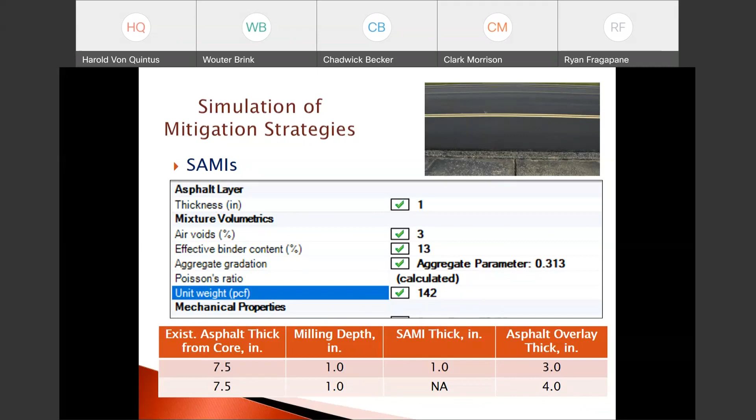Two examples where we have an existing asphalt thickness from cores of 7.5 inches. Both have a milling depth of an inch on the existing pavement. In one case we put a SAMI layer of an inch plus an asphalt overlay of 3 inches; in the other case we don't use the SAMI and instead have a 4-inch asphalt overlay.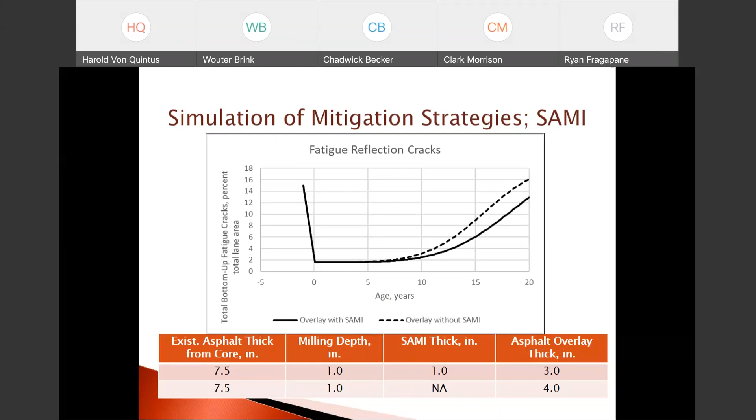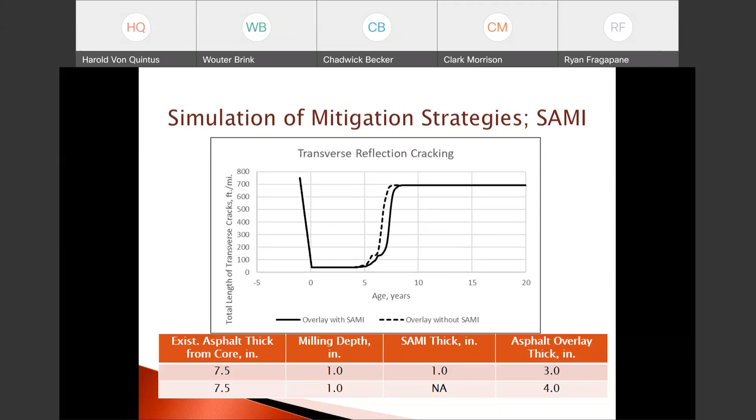So now let's look at the different strategies, because I want to come back to these specialized mitigation strategies. This would be the SAMI layers, the interlayers, and other types of proprietary material that were not included, or if they were, there were only a few sites included within the calibration database to develop the global calibration coefficients I showed near the beginning of this webinar.

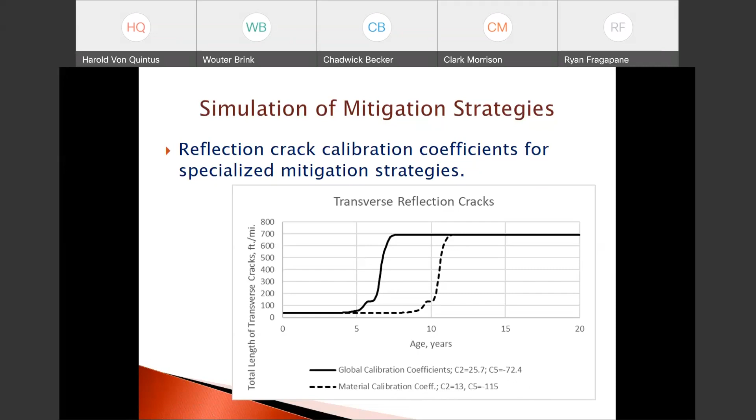Now, summaries and takeaways. This is just a quick summary. The shear component of the reflection cracking mechanism is the most important one. Pavement ME predicts the amount and occurrence of bottom-up fatigue cracks and transverse reflection cracks for most of the reflection cracking delay strategies or design strategies.

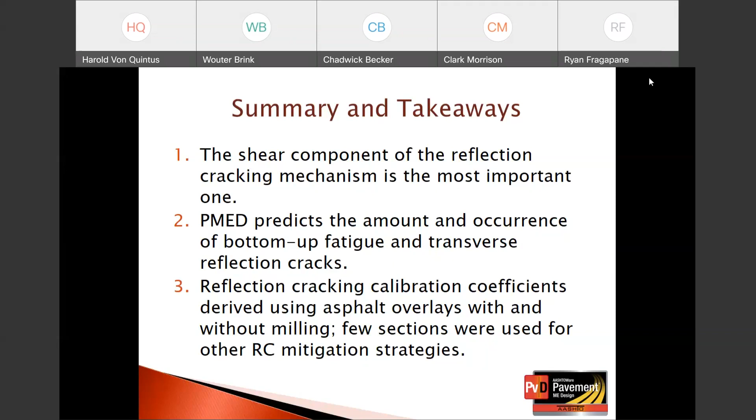Reflection cracking calibration coefficients were derived using asphalt overlays with and without milling. In other words, the majority of them were derived for asphalt overlays that had both with and without milling. Much fewer sections were used for the other reflection cracking mitigation strategies. So those other strategies, in using those calibration coefficients, really should be checked and verified by individual agencies, especially those that routinely use these other mitigation strategies.

The key inputs that have a significant impact on reflection cracking are asphalt overlay thickness, load transfer efficiency - which relates to both fatigue and transverse reflection cracking - the amount of fatigue cracking and or damage in the existing asphalt layer, which is very important, and traffic, which also has a significant impact.

The important reflection cracking calibration coefficients to be considered are the C2 shear calibration coefficient, or K2 - so C2 is the calibration coefficient for K2, stated differently. C4, as part of the transfer function, basically changes the magnitude of cracking at any point in time relative to the global C4. And C5 basically changes the rate of cracking over time.

So C4 basically extends the magnitude, kind of delays the cracking. C5 in the transfer function changes the rate of cracking. So the delay would be rate dependent.

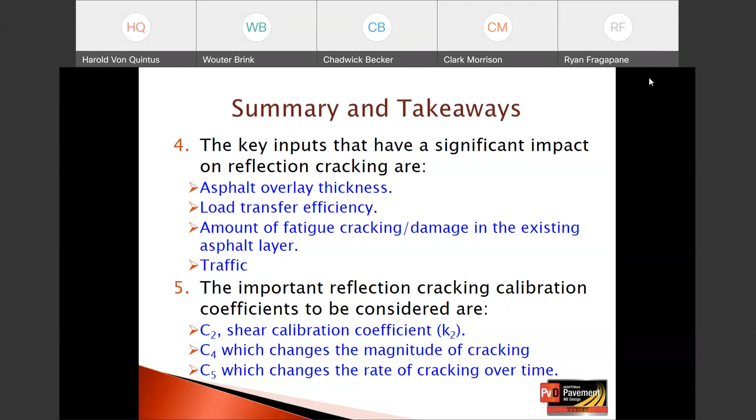And so measuring load transfer efficiency at transverse cracks and joints does have a significant impact on transverse reflection cracking. The load transfer efficiency of bottom-up fatigue cracking is also important and has a significant impact, but that is typically a calibrated parameter.

And then, to wrap it up, suggestions for future enhancements and considerations should be submitted to the help desk, the AASHTOWare site, and or the task force, especially those that might be related to reflection cracking, as that was the purpose of this webinar.